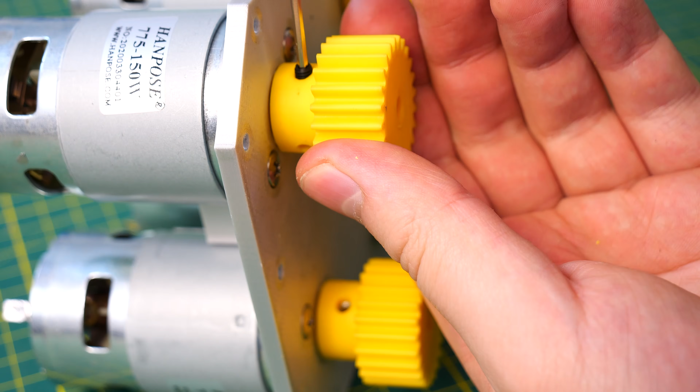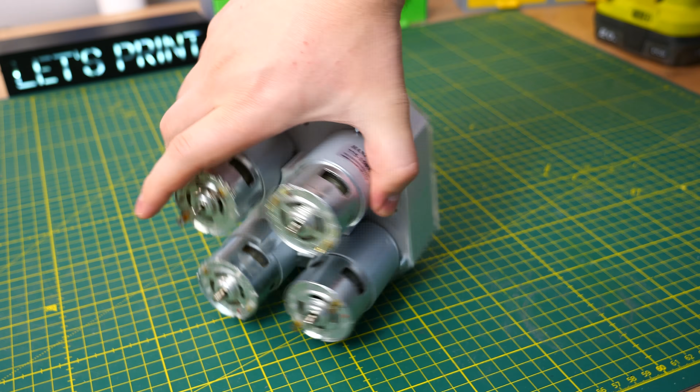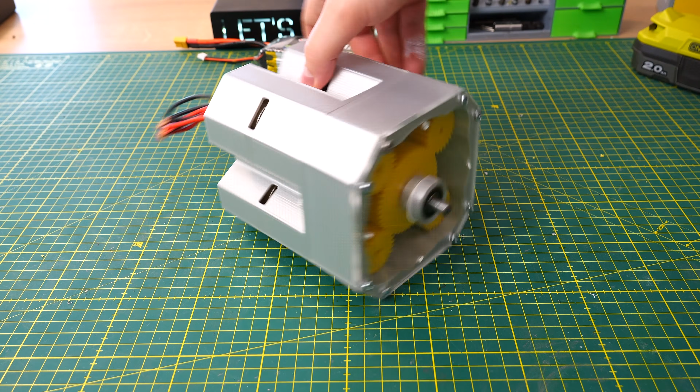In this video I'm going to build a gearbox that is powered by 4 775 DC motors. A little spoiler, it will be great. I have done a really similar thing before, this 6 motor gearbox. It's powerful, it works great, but it's too big to use anywhere. That's why the key to my new design is a more convenient size and body shape, and I did it well. Also, what makes this model practical is that you can turn this into anything. You can just design your own add-ons and attach those directly to this gearbox.

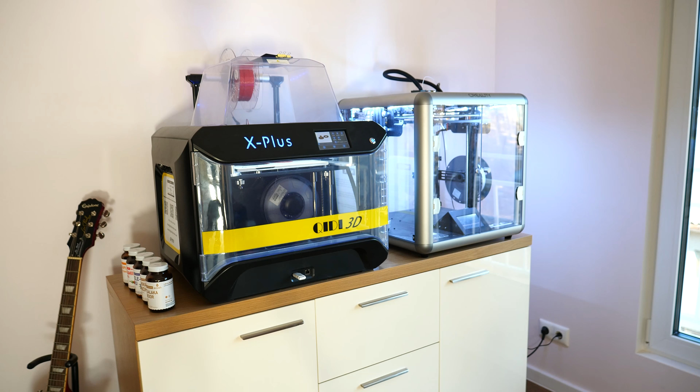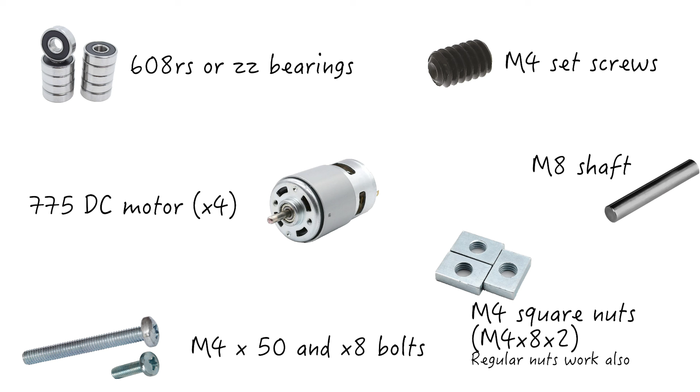For this project we need 4 775 DC motors. Right now I have only 2 and I have no idea when I am going to receive my order. But I borrowed 2 from my 6 motor gearbox.

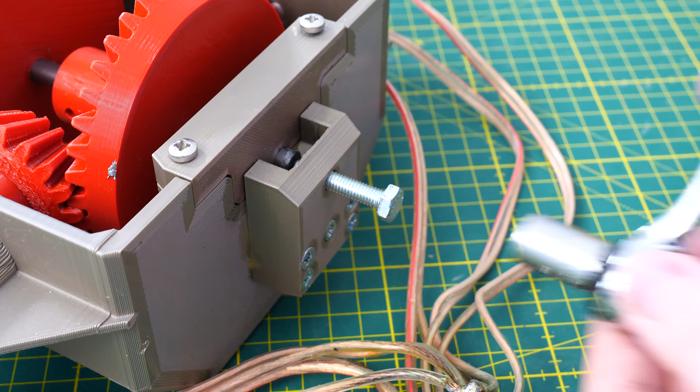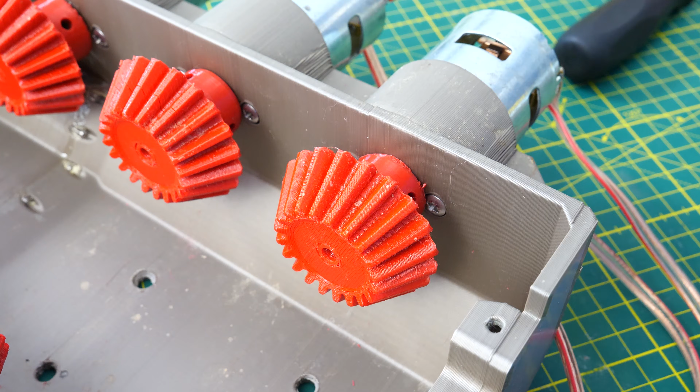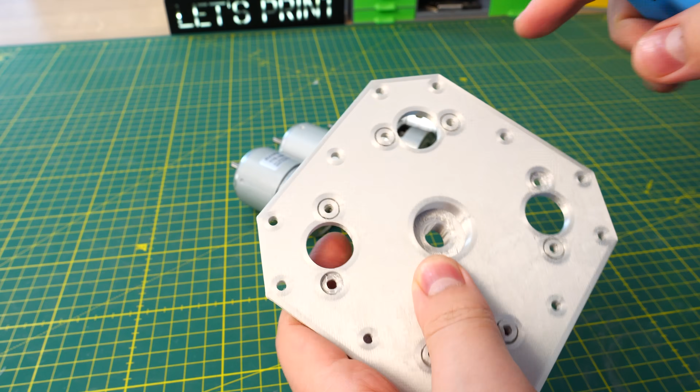Now I have my motors. Next we need obviously 3D printed parts. I 3D printed everything with PLA, and for that I use a Creality Sermoon D1. First we have to screw all motors to the motor mount using M4x8mm bolts. Actually before that I had to remove a little bit of supports and push 2 bearings to both sides of the motor mount. When that's done, I can attach all the motors to the motor mount.

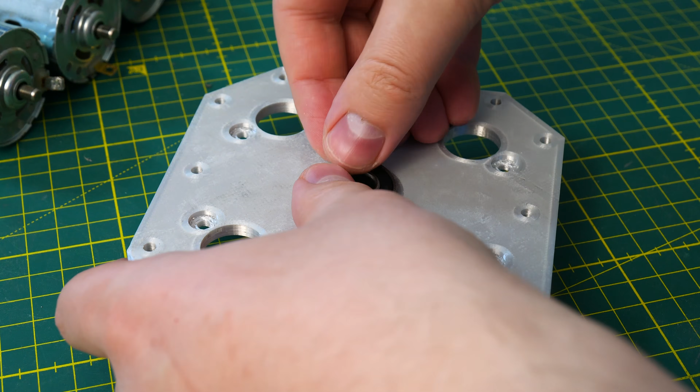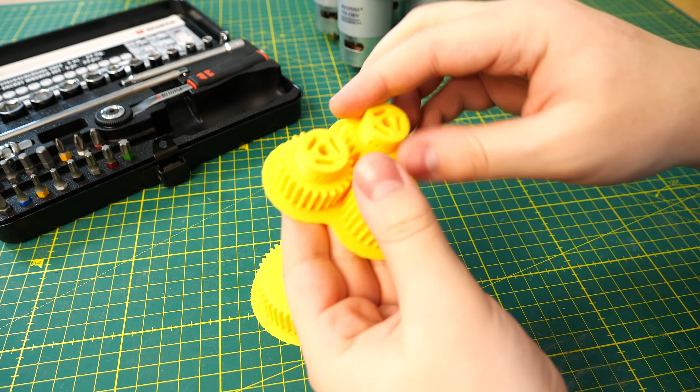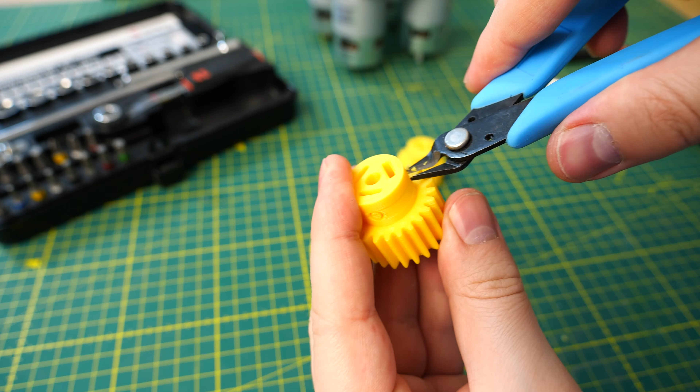It's time for gears. By the way, I say this all the time, but use a raft when you are 3D printing gears. If you don't use a raft, your gears will have elephant foot and they will not work properly. Here I made a little mistake - there is no need for supports, but I accidentally left the supports on and it's just a pain to remove now. But the first step with gears is installing square nuts. It's really easy, just hammer those in. Once that's done, we can screw set screws through them. Next we can attach all 4 small gears to the motor shafts.

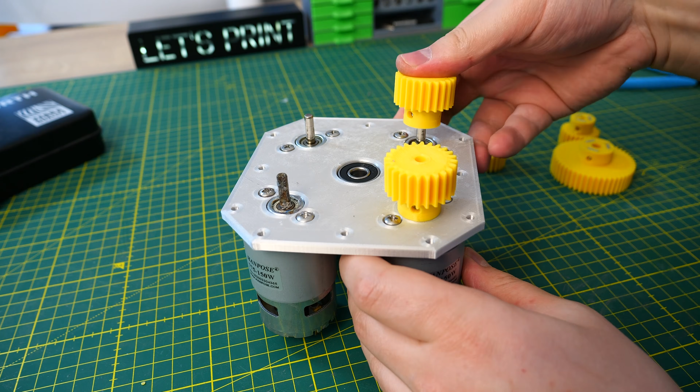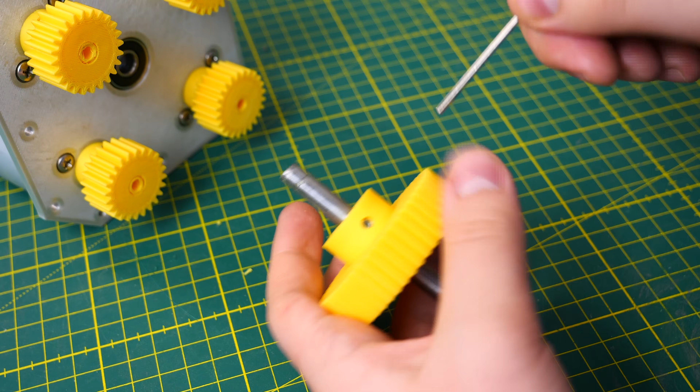Before we can install the big gear, we have to push one 8mm shaft through it. The fit has to be really tight, so don't be afraid to use some force. When the gear is at the right place, I secure it to the shaft with the set screws that I previously installed. Now push the shaft through the bearings, a little wiggle, and the most difficult part, which wasn't really difficult, is done. And we can screw the rest of the body parts together.

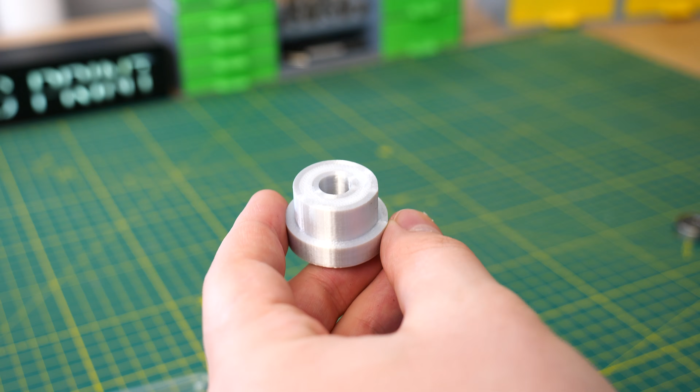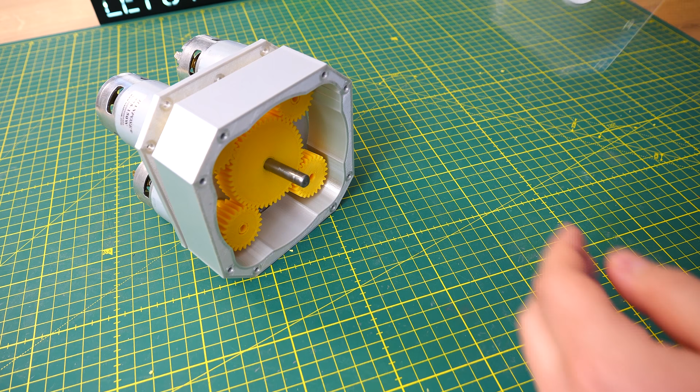Before I can continue, I have to glue this bearing holder to the center of the lid. But of course, before that, I already press fit the bearing in there. Again, if you're going to 3D print the lid, you don't need to do this step, because the correct hole for the bearing will already be there. And now finally we can screw those 2 parts to the rest of the gearbox with M4x50mm bolts.

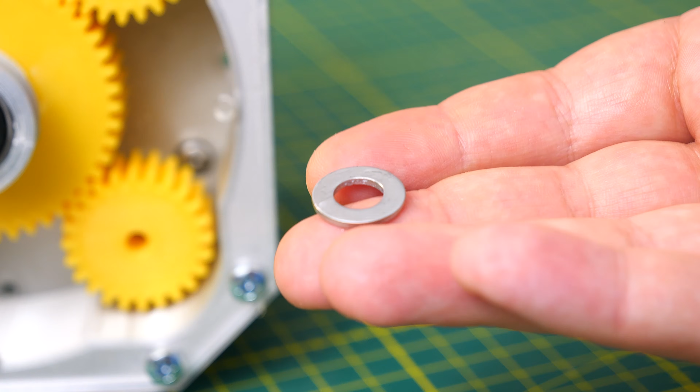This gearbox is now ready to roll, and I forgot one small but important thing: a washer between the output gear and this 3D printed part that I just glued to the lid. That's why this shaft has a little bit of play right now, but I'll fix this later because I'm too excited to run this for the very first time.

Off camera I wired all the wires. I connected all the motors in parallel to my DC motor speed controller, and the power I will take from the 6000 mAh LiPo battery.

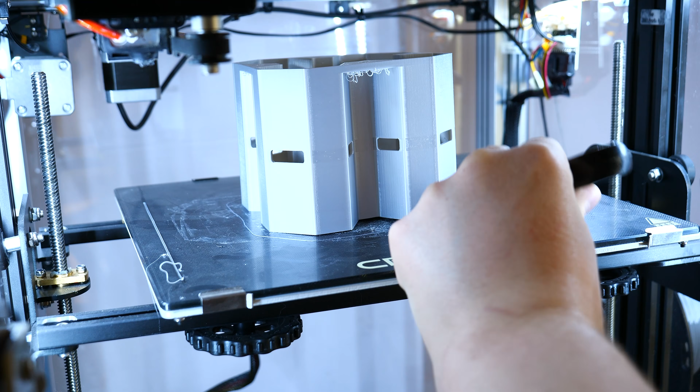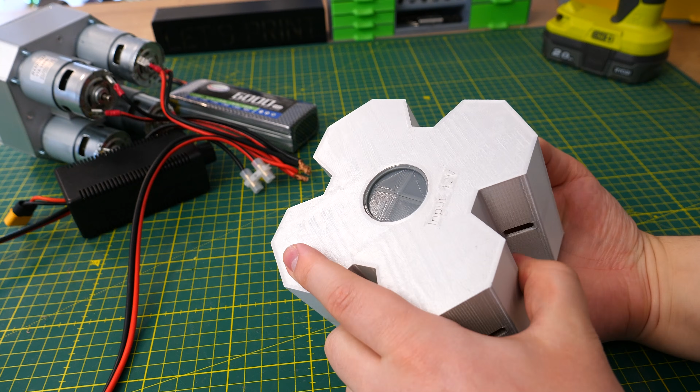Oh, and one more thing - actually it's not so small, but the motor's cover. To make this look a little bit more professional, I 3D printed this type of thing with TPU, and I will glue this on.

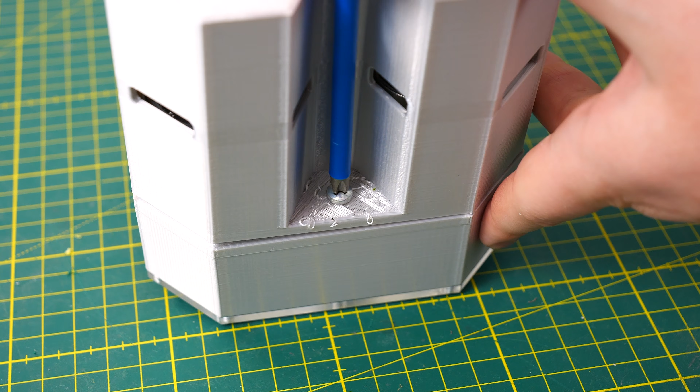Okay, now we are finally done, and this little extra step took me a bit too much time, but let's start with the first test.

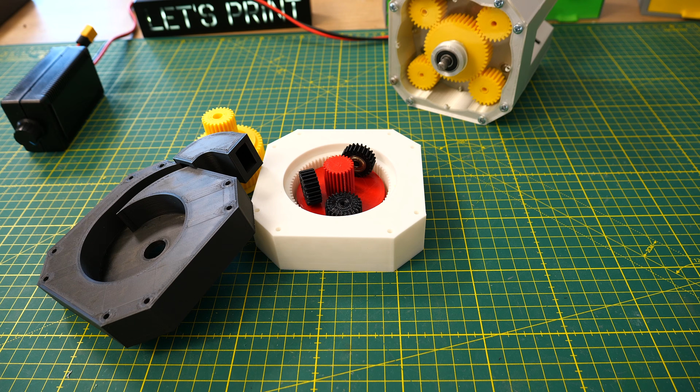Now I'm going to show you how you can make this gearbox into everything. You can use this gearbox as it is and connect it wherever you want with the coupler, but you can also print add-ons. Here are 2 examples: Planetary Gearbox and Water Pump. Let's start with the Planetary Gearbox.

If you have watched my videos before, you have probably seen my yellow Planetary Gearbox, the most popular model that I have ever designed, for a simple reason - it's just so great. Actually, it is working really well, so I didn't design a new one. I took an already existing one and changed the outer body shape.

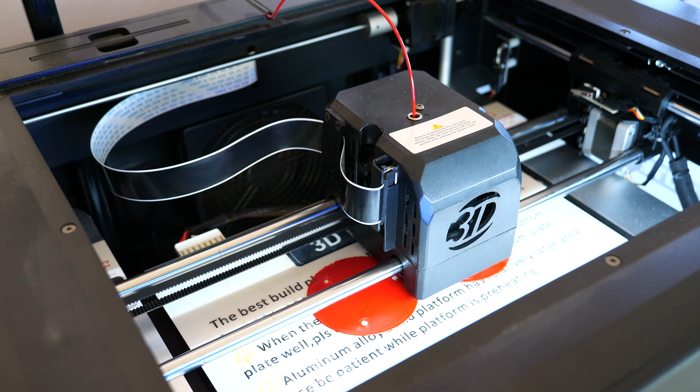And like the last one, this one is also stackable, so you can keep 3D printing those gearboxes and stack them up to the moon. In this case it's not really useful, but theoretically it's possible. By the way, if you are interested in this Planetary Gearbox, I highly recommend watching a video about it.

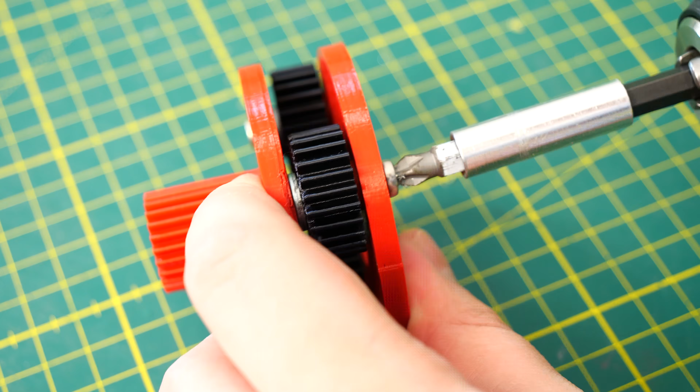Link down below. So basically I put the planet carrier together, and I also had to change the gear inside the gearbox. For this one I had to use a little bit of supports. Oh, and for this one you don't need to push the shaft through it - you have the option, but it's not needed.

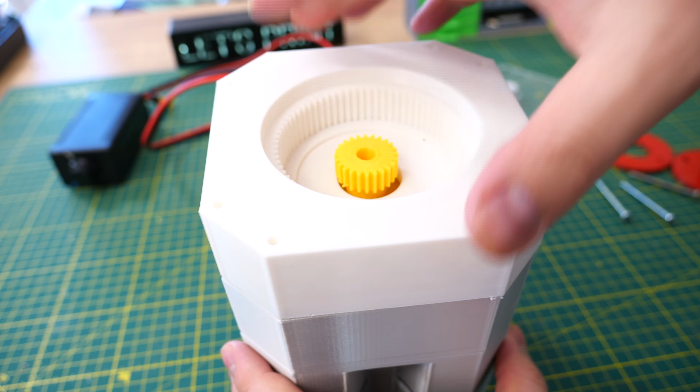This gearbox had a 2:1 gear ratio. Now with this add-on it has 6:1, and with the next one 18:1, and so on. And like we see, it works absolutely perfectly.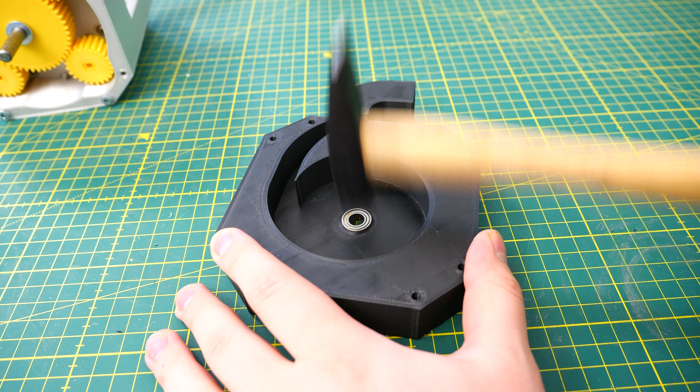I also designed one water pump in less than 10 minutes. I already knew this one will be trash, but I just wanted to prove the concept. But my water pump design is so trash that it didn't even work.

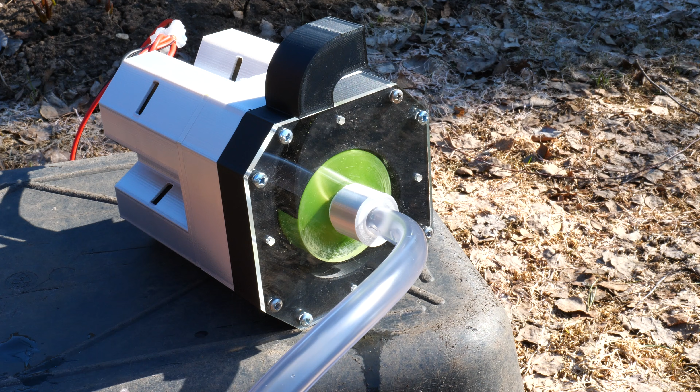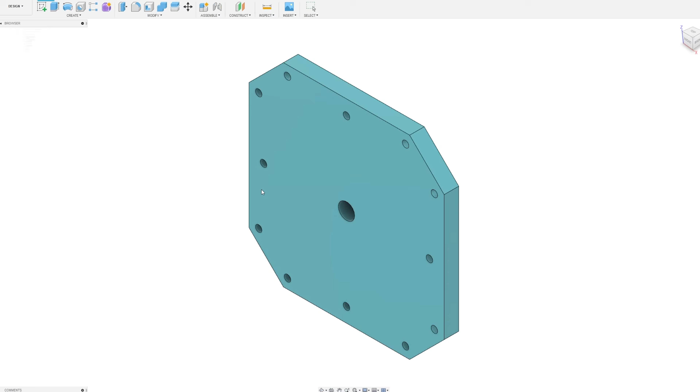For the last part of the video, I want to show you how you can make your own add-ons. First, download the model called add-on for 4x775 DC motor - of course the link is down below and it's completely free. Then go to your preferred CAD software. I'm using Fusion 360. Import the model that you just downloaded and you can start working. I uploaded this model as a step file, so it's really easy to work with and all CAD software supports it.